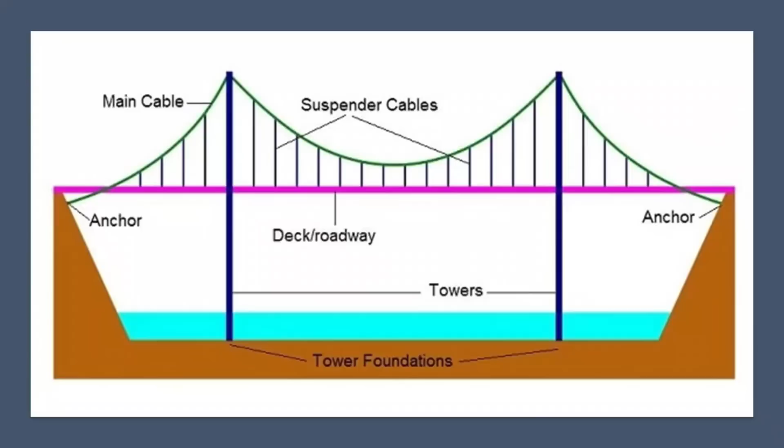He began producing wire rope in Saxonburg in 1841 for use in such projects as suspension bridges. A suspension bridge is one where the deck of the bridge is hung below suspension cables on vertical suspenders.

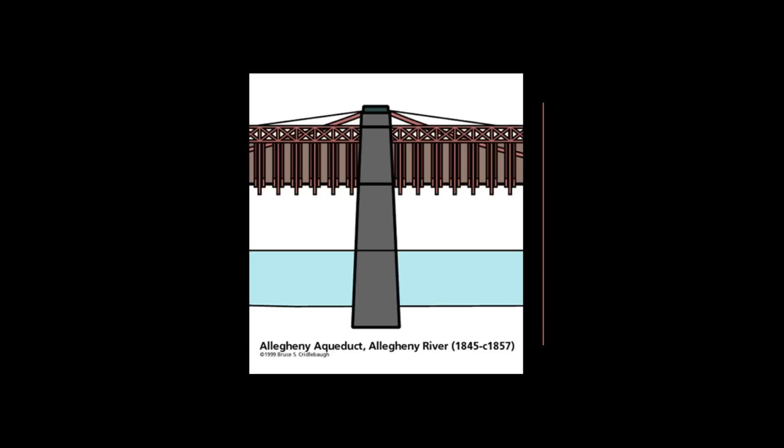In 1844, Roebling was said to have won a bid to replace the wooden canal aqueduct over the Allegheny River with the Allegheny Aqueduct in Pittsburgh, the first wire suspension bridge he was credited with.

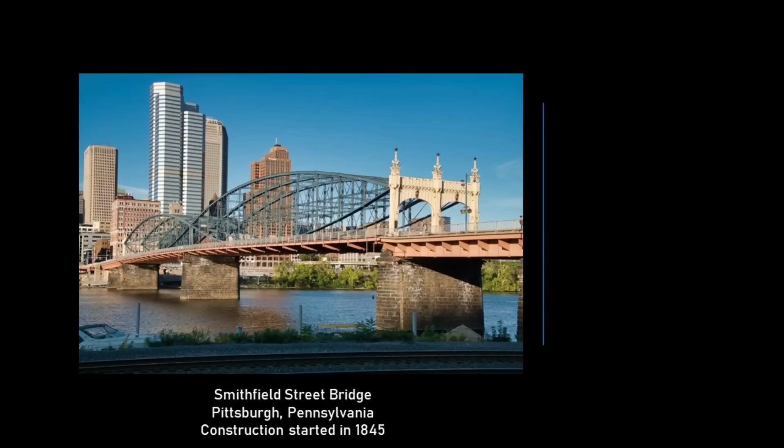The next bridge project Roebling was credited with building was what is known as the Smithfield Street Bridge in Pittsburgh, with construction starting in 1845. The Smithfield Street Bridge is a lenticular truss bridge in which top and bottom chords are curved, which gives the truss an oval or lens shape.

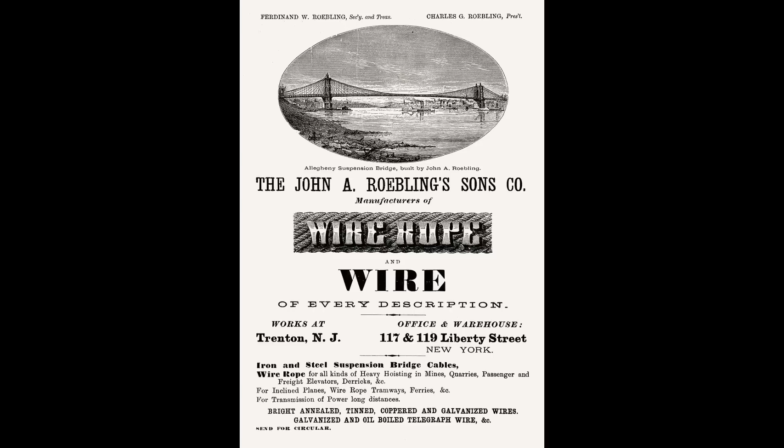Sometime around 1848, he was said to have built a large industrial complex for his growing wire production company in Trenton, New Jersey. We are told that the Roebling wire rope works made the largest contribution to Trenton's reputation as an industrial center, which was memorialized in the motto on the Lower Trenton Bridge: 'Trenton makes, the world takes.'

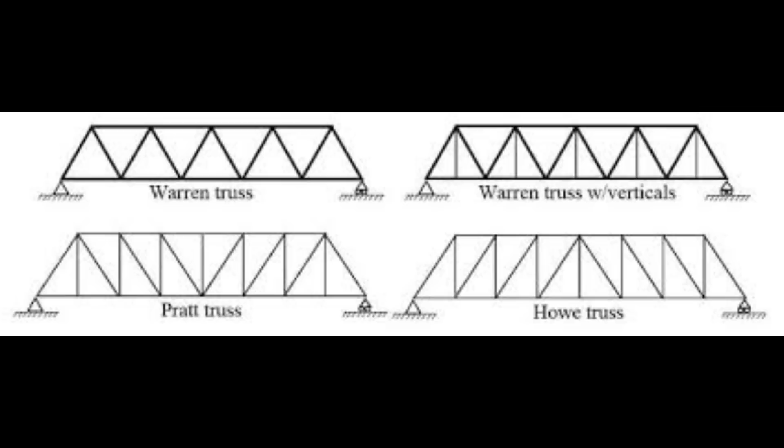The Lower Trenton Bridge is a truss bridge, a bridge where the load-bearing superstructure is composed of a truss, which is a structure of connected elements usually forming triangular units. The John A. Roebling Suspension Bridge connects Cincinnati, Ohio, with Covington, Kentucky, across the Ohio River.

We are told that after the Covington and Cincinnati Bridge Company was incorporated in 1846, Roebling was asked to build a bridge, which was perceived as necessary due to the increase in commerce between Ohio and Kentucky that led to highly congested steamboat traffic and constriction of the economy.

We are told it first formally opened on January 1st of 1867, which would have been less than 2 years after the end of the American Civil War. At the time the bridge opened, it was the longest suspension bridge in the world.

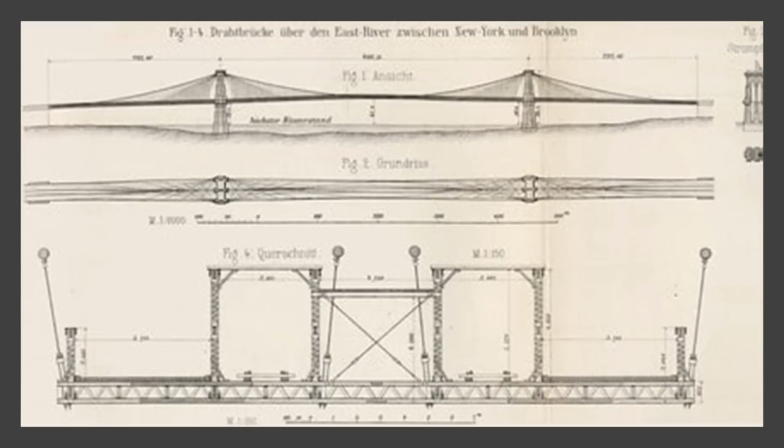The other famous bridge that John A. Roebling received the credit for was the Brooklyn Bridge. We are told he started the design work on the Brooklyn Bridge in 1867, but that on June 28th of 1869, when he was standing at the edge of the dock to fix the location of where the bridge would be built, his foot was crushed by an arriving ferry, requiring the amputation of his injured toes.

His death on July 22nd of 1869 was caused by tetanus after he refused medical treatment. The construction of the Brooklyn Bridge was said to have been completed by his son, Washington Roebling.

The Brooklyn Bridge reminds me in appearance of the Sidi M'Cid Bridge in Constantine, Algeria, known as the City of Bridges. The Sidi M'Cid Bridge was at one time the highest suspension bridge in the world.

Ralph Modjeski is the next prolific bridge builder I'm going to take a look at, a Polish-American civil engineer who is said to have specialized in bridges.

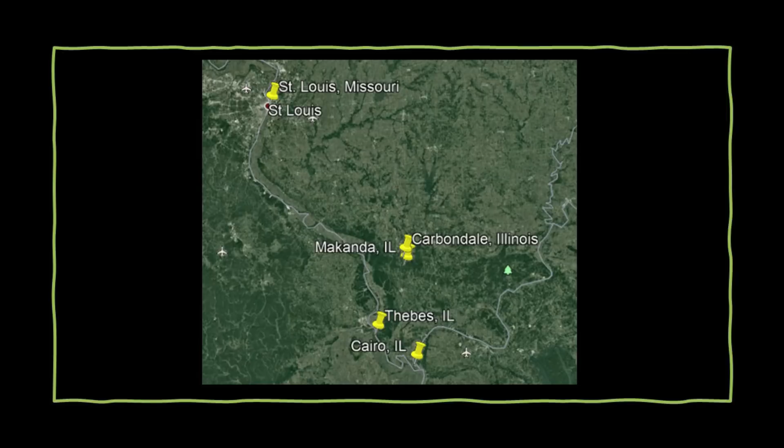One of the bridges he was credited with is in Thebes, Illinois, on the Mississippi River, located near Cairo, Illinois, which sits at the confluence of the Mississippi and Ohio rivers, in a part of Illinois long referred to as Little Egypt.

Like Cairo, Thebes was said to have been named for the Egyptian city of the same name, and is perhaps best known for the Thebes Bridge, a 5-span cantilever truss railroad bridge said to have been built for the Union Pacific Railroad and opened for use in 1905, with construction starting in 1902.

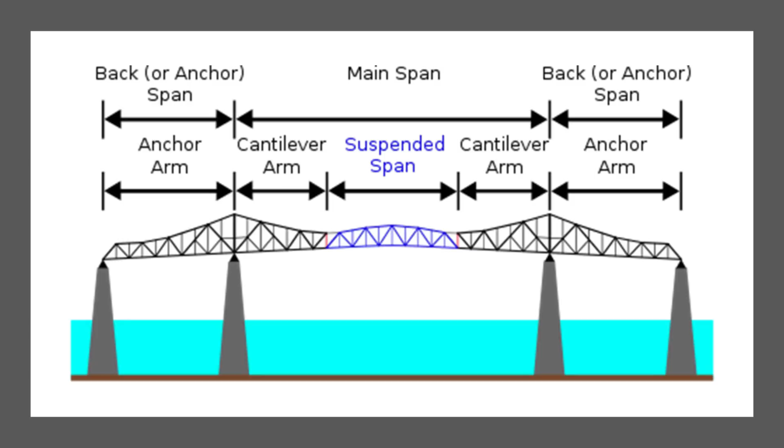A cantilever bridge is one built using structures that project horizontally into space and are only supported at one end by what are called cantilevers. Large cantilever bridges designed to carry road or rail traffic use structural steel trusses or box girders made from pre-stressed concrete.

Ralph Modjeski was born in Poland in 1861 and immigrated to America with his mother and stepfather in 1876. He returned to Europe and studied at the L'École des Ponts et Chaussées, or School of Bridges and Roads, in Paris. He received his American citizenship while in Paris in 1883, and graduated first in his class from the School of Bridges and Roads in 1885.

Upon his return to America, Ralph Modjeski worked first for George Morison, an attorney turned civil engineer known as the father of American bridge building.

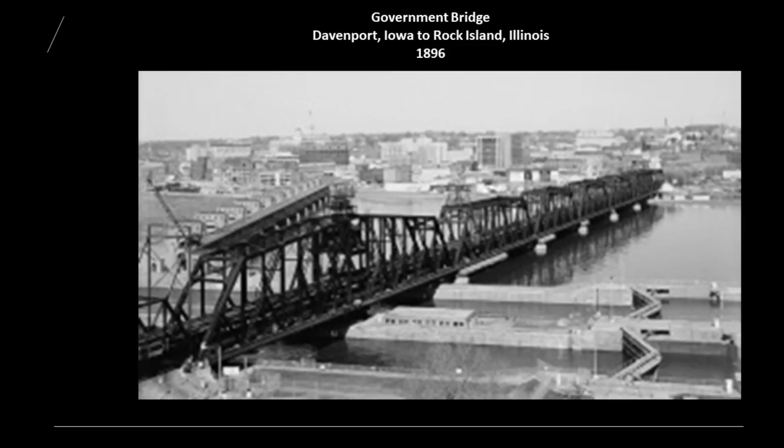Ralph Modjeski opened his own firm in Chicago in 1893, the same year as the World's Columbian Exposition, and his first project as chief engineer was said to be the railroad bridge across the Mississippi from Davenport, Iowa to Rock Island, Illinois, called the Government Bridge, said to have been completed in 1896.

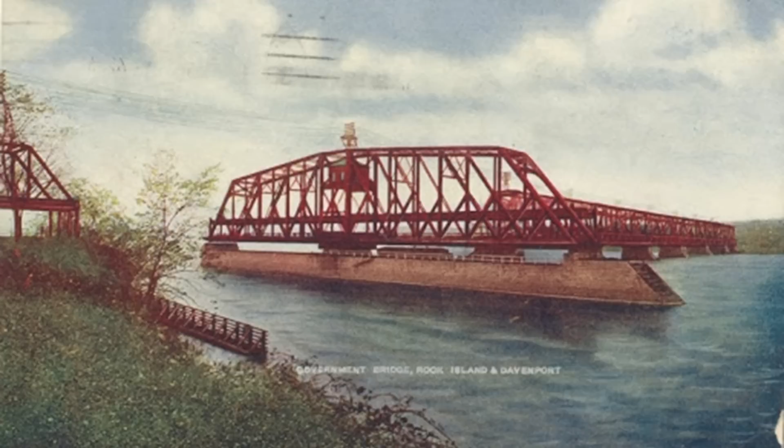The Government Bridge is a double-decker steel truss bridge, with the upper deck used for railroad traffic and the lower deck used for vehicular and pedestrian traffic. The Government Bridge has a swing section to accommodate river traffic, which can rotate 360 degrees, and is one of the oldest bridges of its kind still in use on the Mississippi River.

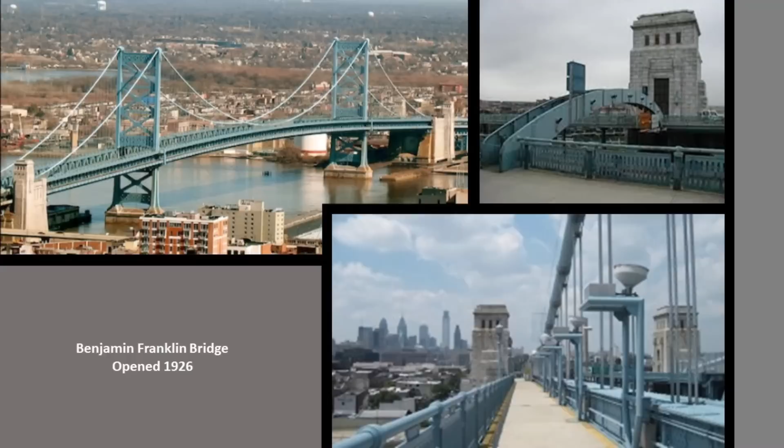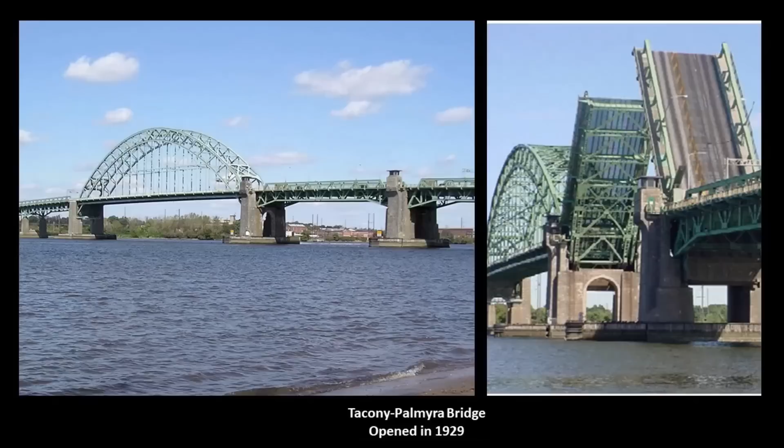Modjeski was credited with the Benjamin Franklin Bridge, a suspension bridge connecting Camden, New Jersey and Philadelphia, Pennsylvania, opening in 1926, one of 4 primary bridges between Philadelphia and southern New Jersey, as well as the Tacony-Palmyra Bridge over the Delaware River in northeast Philadelphia, a steel-tied arch and double-leaf bascule bridge that opened in 1929.

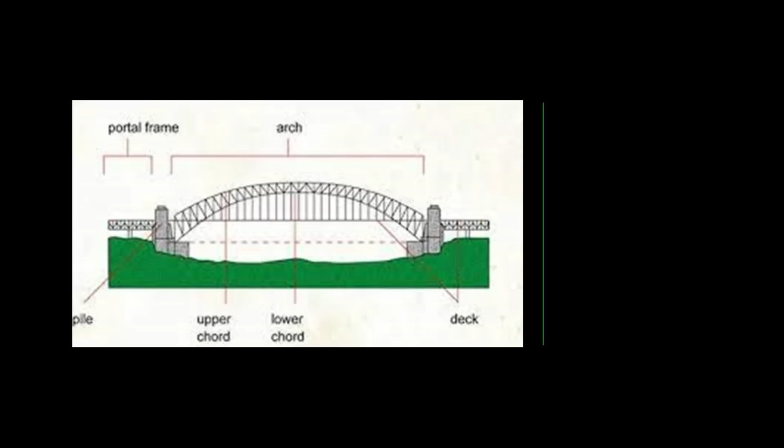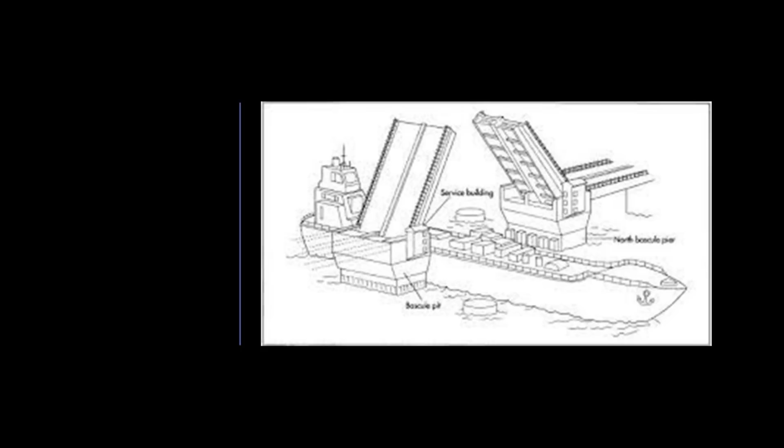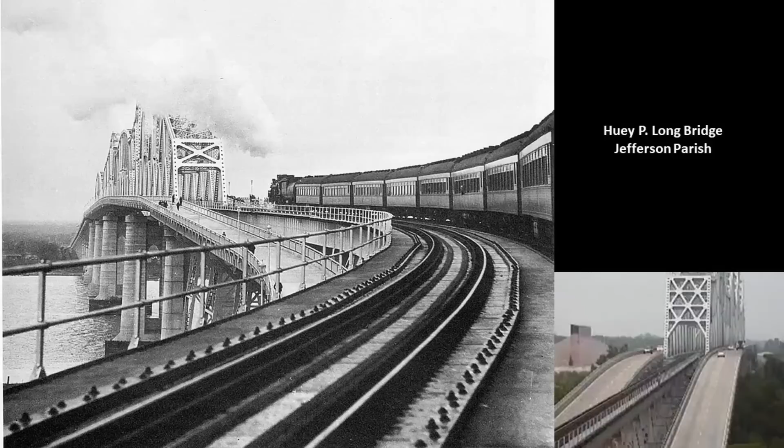Modjeski was also credited with being a consulting engineer for the Trans-Bay Bridge, or Bay Bridge, between San Francisco and Oakland in California, a complex of bridges including steel truss, cantilever, and suspension-style bridges. When it opened in 1936, the upper deck carried vehicular traffic and the lower deck carried commuter trains until the Key System Mass Transit Service abandoned rail service in 1958, at which time the lower deck was converted to all road traffic as well.

As chief engineer of the project, Ralph Modjeski was also credited with the design of the Huey P. Long Bridge in New Orleans, Louisiana, said to have been part of Long's legacy as governor of Louisiana, as part of his unprecedented public works program, which took place during the Great Depression.

It is a cantilevered steel truss bridge carrying 6 lanes of US 90 and 2 tracks of the New Orleans Public Belt Railroad across the Mississippi River, constructed between January of 1933 and December of 1935.

Speaking of San Francisco, it was said to have been founded by Spanish colonists in 1776, who built a fortification called El Presidio Real de San Francisco, or the Royal Fortress of St. Francis of Assisi, at what is now simply called the Presidio.

It was a park and former U.S. military installation until 1994, when it was transferred to the National Park Service. I looked at a map of the Presidio and noticed Fort Point at its tip, where Highway 101 crosses San Francisco Bay over the Golden Gate Bridge, and sure enough, found what looks like a star fort tucked away underneath the base of the bridge.

Battery Boutelle is also on the Presidio grounds beside the bridge. This is what it looks like inside the structure at Fort Point, underneath this end of the Golden Gate Bridge.

It includes a lighthouse, which reminded me of Fort Wadsworth's Battery Weed on the Staten Island side of the Verrazano Narrows Bridge, crossing over to Brooklyn in the narrow channel between Lower New York Bay and Upper New York Bay.

Since I knew that Fort Hamilton is located right next to the base of the Verrazano Narrows Bridge on the Brooklyn side, I looked on the other side of the Golden Gate Bridge, since I consistently find star forts in one or more pairs around the world, and I found Battery Spencer on the other side of the bay, right next to the bridge.

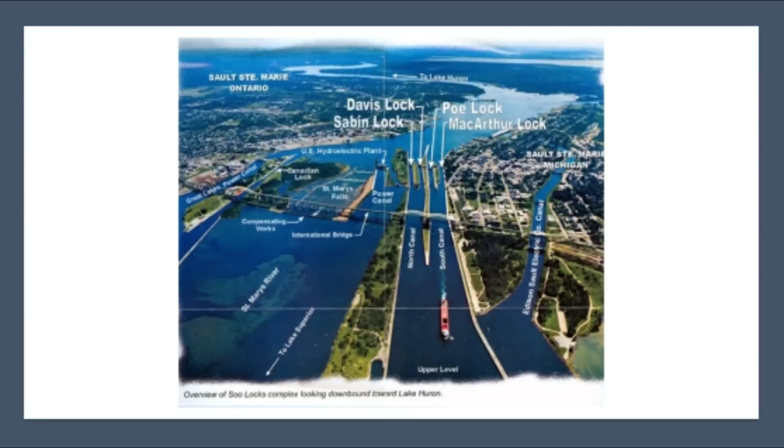Here we find the Soo Locks, the largest waterway traffic system on Earth, called the linchpin of the Great Lakes, allowing ships to travel between Lake Superior and the lower Great Lakes, where Lake Superior meets Lake Huron. The Soo Locks are considered a wonder of engineering and human ingenuity.

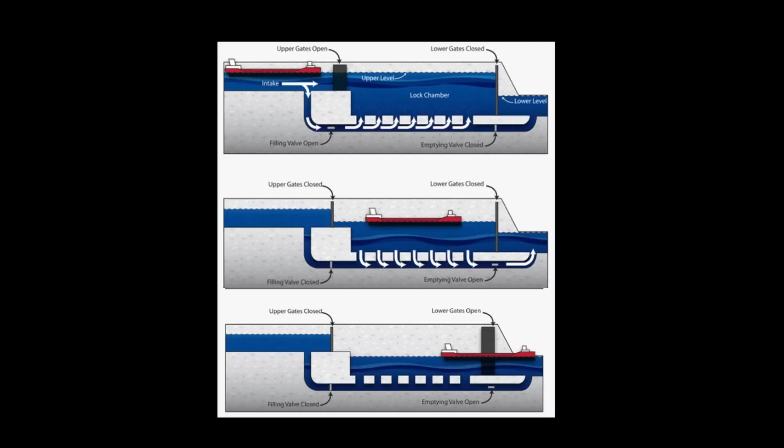They bypass the rapids of St. Mary's River, where the river drops 21 feet, or about 6.4 meters, over hard red sandstone in a short three-quarter mile, or 1.2 kilometer, stretch.

The first locks were said to have been built here in 1855 and operated by the state of Michigan until transferred to the U.S. Army Corps of Engineers in 1881, who own, maintain, and operate the St. Mary's Falls Canal, within which the locks are located.

The Sault Ste. Marie International Bridge connects the United States and Canada, permitting vehicular traffic to pass over the locks. It is a truss arch bridge with a suspended deck, with the years between 1960 and 1962 given as its construction dates. The total length of the bridge is 2.8 miles, or 4.5 kilometers.

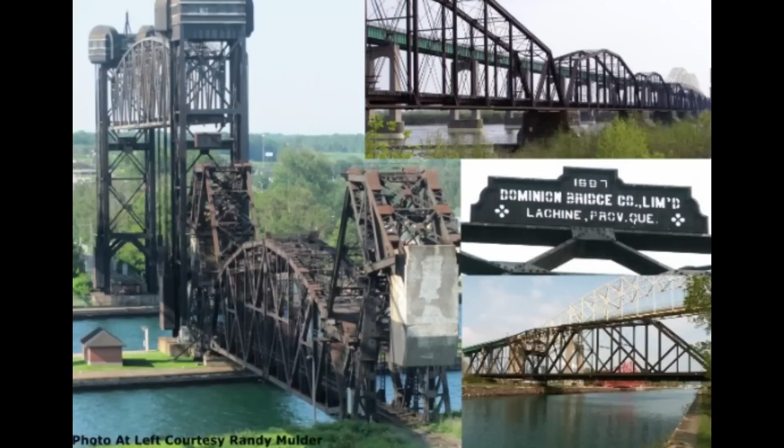The Sault Ste. Marie International Railroad Bridge runs parallel to the International Bridge and was said to have been built almost 100 years earlier, in 1887.

The railroad bridge has 9 camelback spans, a plate girder overpass and plate girder spans, a double-leaf bascule bridge, a vertical lift bridge, and a swing bridge, and carries a single set of train tracks.

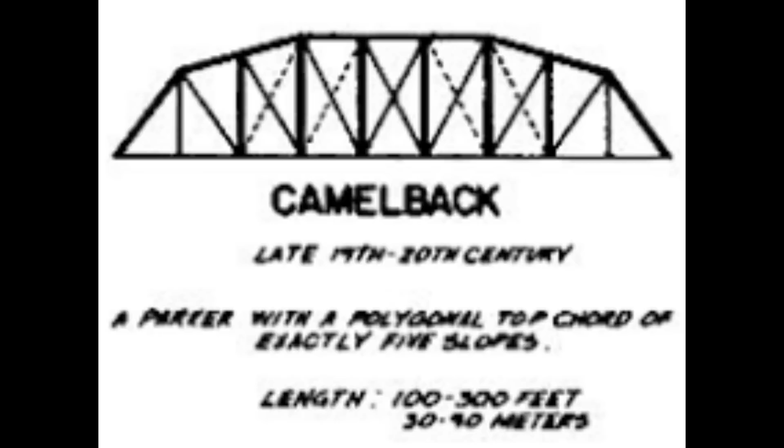Now let's break down the types of bridge into component parts we haven't talked about already. Firstly, camelback spans are trusses that have a polygonal upper chord of exactly 5 slopes. We are told this saves material and that the greatest depth of the truss is at the center of the span where it is most required. Next, plate girder spans and overpasses utilize a steel beam in their construction.

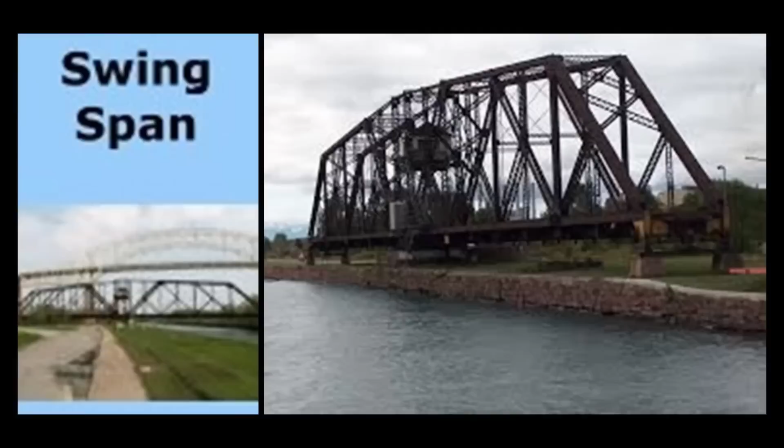A vertical lift bridge is a type of movable bridge in which the span rises vertically while remaining parallel to the deck of the bridge. Lastly, a swing bridge is a type of movable bridge that has a vertical locating pin and support ring as its primary structural support, usually at or near its center of gravity.

I have encountered other examples of the sophisticated engineering of bridges like these in the Great Lakes region, like the Duluth Aerial Lift Bridge. It spans the Duluth Ship Channel and Minnesota Point and was said to have been first constructed between 1901 and 1905 and modified between 1929 and 1930.

While it has been a vertical lift bridge since 1930, the Duluth Aerial Lift Bridge started out as a transporter bridge, also known as an aerial transfer bridge, said to be the first of two of its kind in the United States. It was a type of movable bridge that carried a segment of roadway across a river.

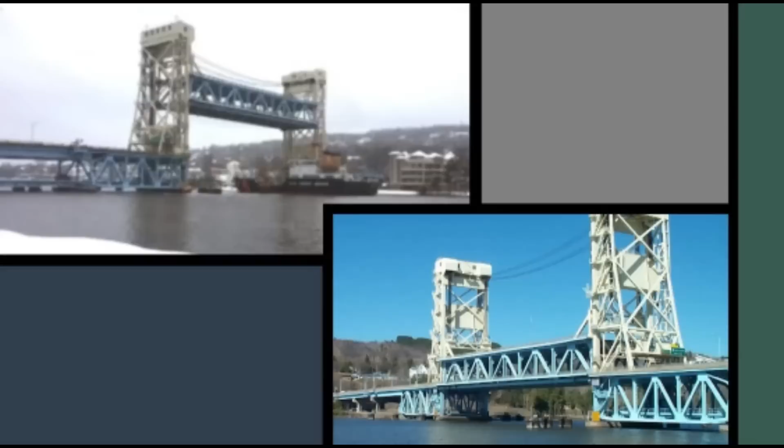I encountered the Portage Lake Lift Bridge when I was researching Michigan's Keweenaw Peninsula, where it connects the cities of Houghton and Hancock across Portage Lake, which is part of the waterway which cuts across the Keweenaw Peninsula, with a canal linking the 5 miles to Lake Superior to the northwest.

The vertical lift bridge was said to have first been built in 1895 to replace a damaged wooden swing bridge that was built in that location in 1875, and the current steel bridge replaced the previous steel bridge in 1959. It is the world's heaviest and widest double-decked vertical lift bridge.

The Portage Lake Lift Bridge is on the only land route across the waterway, which is U.S. Highway 41, that, like I-75, also originates in Miami, Florida.

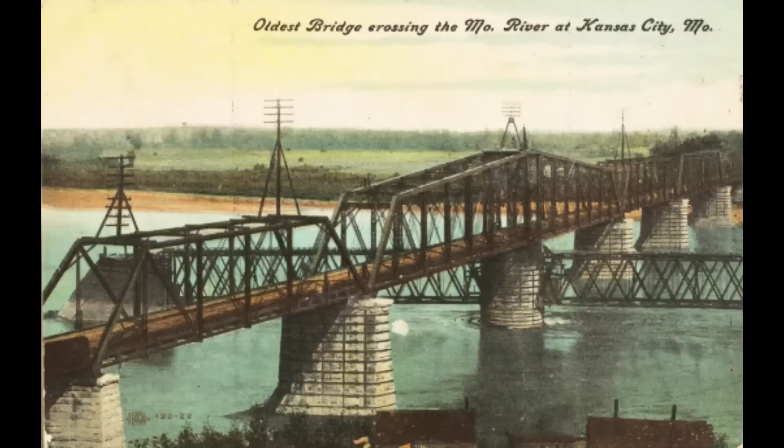The oldest bridge crossing the Missouri River was the first Hannibal Bridge, said to have been completed in 1869, 2 years after its construction started in 1867, and 4 years after the end of the American Civil War. It was the first permanent rail crossing of the Missouri River, and it established Kansas City as a major city and rail center.

After the completion of the Hannibal Bridge, we are told the need for the Kansas City Union Depot arose. After all, soon after the Hannibal Bridge opened, it carried 8 railroads shipping freight to major trade centers in the east, like St. Louis, Chicago, and New York.

Here are a number of other bridges I have come across in the course of doing research, though there are countless more examples than the ones that I'm sharing.

The Dubuque Railroad Bridge is currently operated by the Canadian National Railway, who purchased the Illinois Central Railroad in 1999. It is a single-track railroad bridge that crosses the Mississippi River between Dubuque, Iowa, and East Dubuque, Illinois, that has a swing span. The original swing bridge was said to have been built in 1868, and we are told that it was rebuilt in 1898.

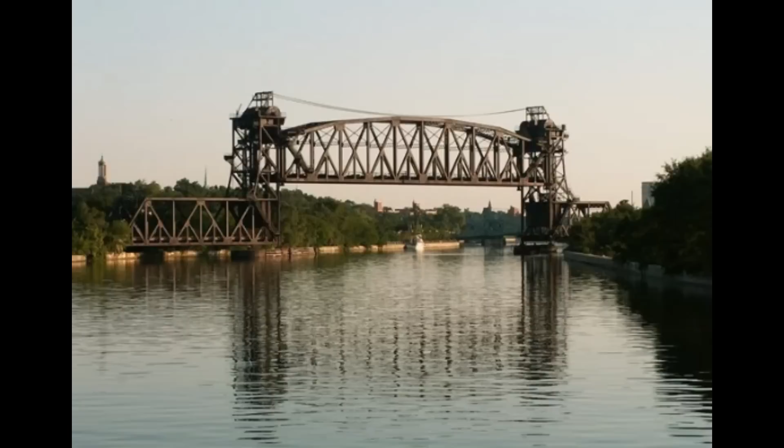The Joliet Railroad Bridge is a vertical lift bridge over the Des Plaines River, said to have been built in 1932, which would have been in the middle of the Great Depression, which was considered to have started in August of 1929 and lasted until March of 1933.

The Tower Bridge is also a vertical lift bridge and connects Sacramento and West Sacramento across the Sacramento River. The construction of the Tower Bridge as a replacement bridge for the 1911 M Street Bridge was said to have started in 1934 and opened in 1935, also around the time of the Great Depression and the beginning of World War II.

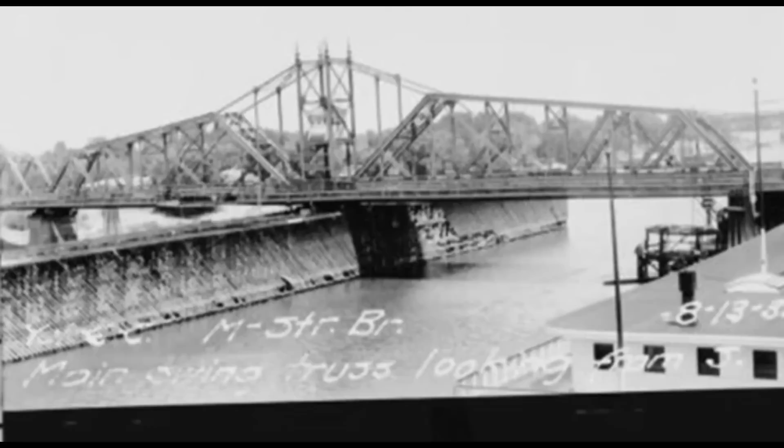The original 1911 bridge was described as a swing-through truss railroad bridge that was determined to be inadequate as a result of Sacramento's population growth doubling between 1910 and 1935, and the city's concern for needing a better crossing over the Sacramento River in case of war.

Alfred Eichler was credited as the architect of the Tower Bridge, and its architectural style described as a rare use of streamlined moderne, a style of Art Deco that emerged in the 1930s. The 2 towers of the bridge alone are 160 feet or 49 meters high.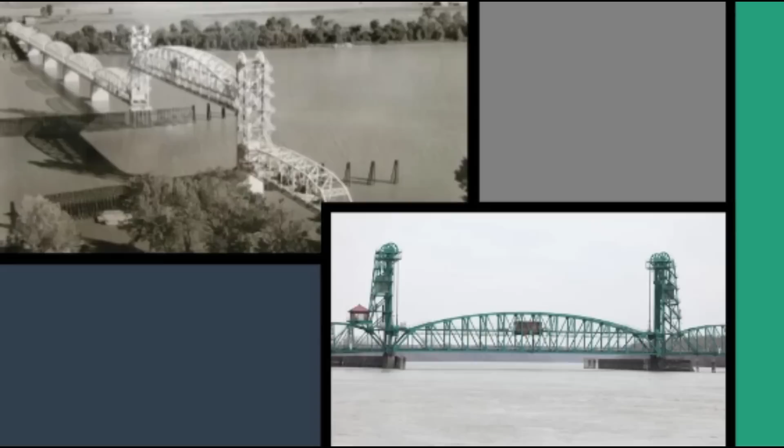The Joe Page Bridge in Hardin, Illinois, named after a local politician who lived between 1845 and 1938, is a vertical lift bridge that links Greene and Calhoun counties across the Illinois River. Its lift span is just a little over 300 feet or 94 meters long, making it the longest span of this type in the world.

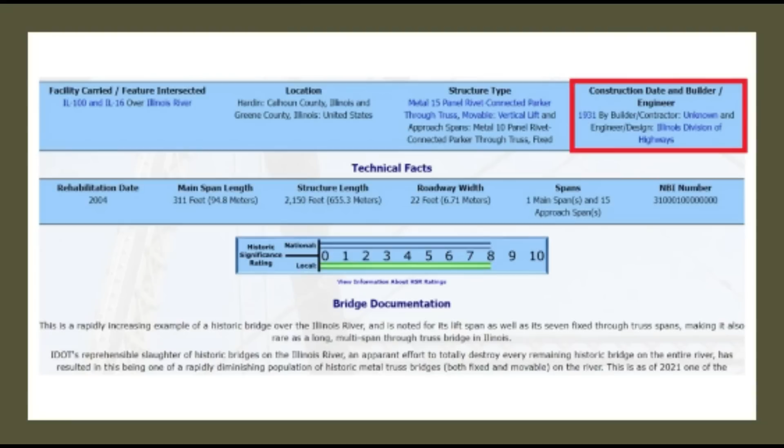The bridge was said to have been built in 1931 by an unknown builder, though the State of Illinois Division of Highways is given credit for the engineering and design work.

The Joe Page Bridge is the southernmost of 3 vertical lift bridges on the Illinois River used by Illinois Route 100, which makes up much of Illinois River Road, a U.S. National Scenic Byway. The Florence Bridge on Illinois Route 100 connects the town of Florence, Illinois to Scott County, Illinois.

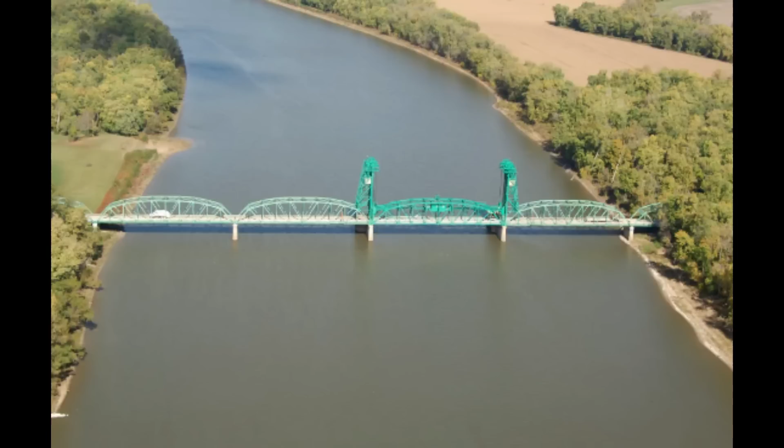The population of Florence was 71 at the time of the 2000 census, and Scott County is the 4th least populated county in the state of Illinois. The Florence Bridge was said to have first opened in 1929, and like the Joe Page Bridge, is also listed as builder unknown. The northernmost of the 3 vertical lift bridges crossing the Illinois River is the Beardstown Bridge, located at Beardstown, Illinois, between Schuyler County, Illinois, and Beardstown.

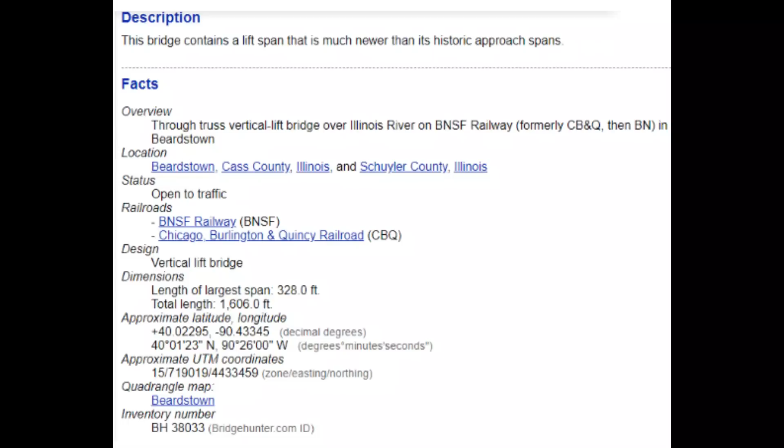The current bridge was said to have been built in 1955 and rehabilitated in 1985. I can't find out much information on the Beardstown Bridge either.

The BNSF Nooksack River Bridge is a swing bridge for the railroad in Ferndale, Washington. BNSF is the largest freight railroad network in North America, and Amtrak uses it as well. The bridge used to rotate, but it doesn't anymore.

It has come to be known as the Ferndale Metallica Bridge because over the last 30 years, someone has been painting Metallica logos on it. When I started looking for information on the construction date for the bridge, the only thing I could find referencing a construction date was that it was said to have been first built in 1890 and a replacement date of 1957, with a question mark.

The Pacific Highway Interstate Bridge consists of a pair of steel truss vertical lift bridges that carry Interstate 5 over the Columbia River between Vancouver, Washington, and Portland, Oregon. Construction was said to have started in 1915 and opened in 1917 as a single bridge carrying 2-way traffic.

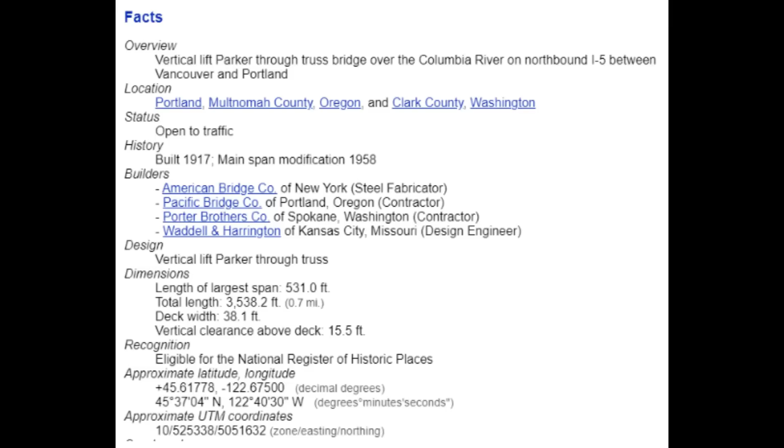I would like to point out that that would have been in the middle of World War I, which started in 1914 and ended in 1918. We are told the second bridge opened in 1958.

The Burlington Northern Railroad Bridge 9.6 crosses the Columbia River into Portland just below what is called the Triangular Junction. The 2,807-foot or 856-meter-long railroad bridge, which was said to have been built between 1906 and 1908, has a swing span which pivots on its base to let the taller ships pass through.

The 9.6 in the bridge's name refers to the distance between the bridge and Portland's Union Station, which was said to have been built between 1890 and 1896 in the Romanesque Revival architectural style.

I want to end this video with some thoughts about bascule bridges. They first came to my awareness about a year ago when a video about two of Cleveland's bascule bridges popped up on my YouTube feed. I had not heard of a bascule bridge before then.

What really got my attention is that the bascule bridges being highlighted were long abandoned and left permanently in a raised state. I can't help but wonder if this is a message from whoever was behind the deconstruction and reattribution of the sophisticated infrastructure of the original civilization and energy grid system, and is giving it and us the middle finger. Perhaps not, but something to consider given what has taken place here to destroy the infrastructure and the memory of the original civilization.